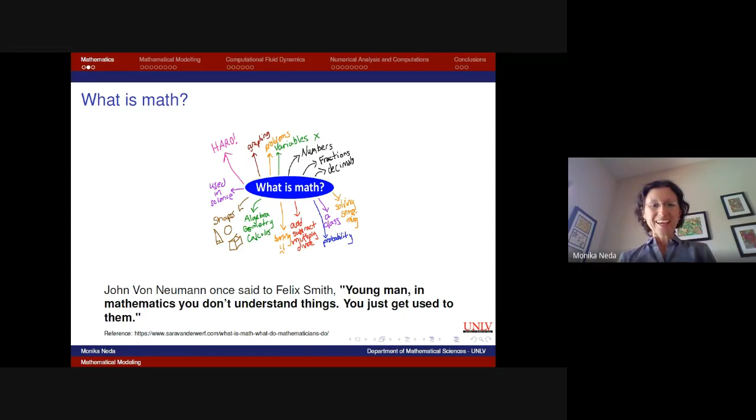Now, leaving that aside, what really is math? From Britannica, we have a definition that covers many things, but if we just take one step back, it's clear that math is all about structure, order, relation, backed by logical reasoning and quantitative calculations. Mathematics is indispensable to physical sciences and technology, and in more recent years, even to life sciences.

Now, the word mathematics comes from Old Greek, the ancient language mathema, which means that which is learned or what one gets to know, or study. So the roots of mathematics really lie in Greek civilization, which many years BC started to work on all these different topics that we're still using today.

So with that said, I'm going to go into mathematical modeling, which I think resonates with the general public and is connected with every corner of science you've probably been studying. So what are really the main steps in the process of modeling?

The first step is that you define a problem, or simply a problem appears to you and you need a solution for it. So we're trying to do this systematic approach where we break down this complex phenomena or process that we have in nature or in other industrial applications, and then try to find a solution for it.

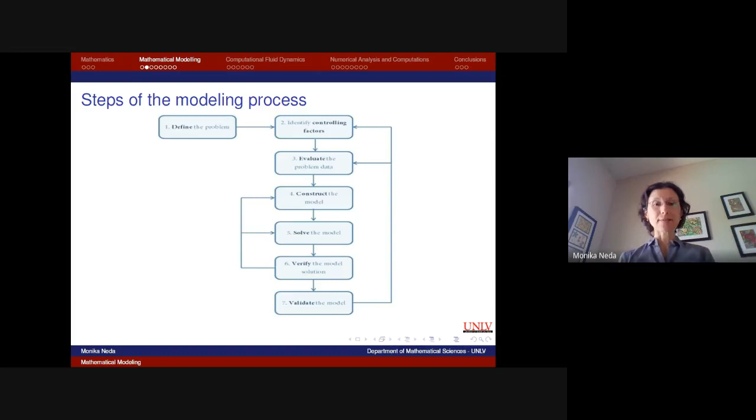So keeping some of these steps in mind, I'm going to try to quickly mimic them with a very simple problem: finding a function that models your electricity bill. Nevada Power gives us one every month—they have some functions, some model, they plug in some inputs, and they go back and get us the bill that gets mailed or emailed to all of us.

This is a very simple one here—they actually have a much more complicated thing. But let's say we have a charge of 11 cents per kilowatt hour for electricity, and a $15 basic connection charge per month. Well, this can be modeled with a very simple linear function, a line. We have 15 as our y-intercept, because when x is 0, meaning you did not spend anything, you still have to pay the $15 connection fee.

As you start spending, x is the kilowatt hour electricity usage, you multiply by 11 cents, 0.11, to get the total amount of charge in terms of x, the usage. So this function has a slope of 0.11, this change with respect to x, and it's simply a line, a graph, very easy to understand.

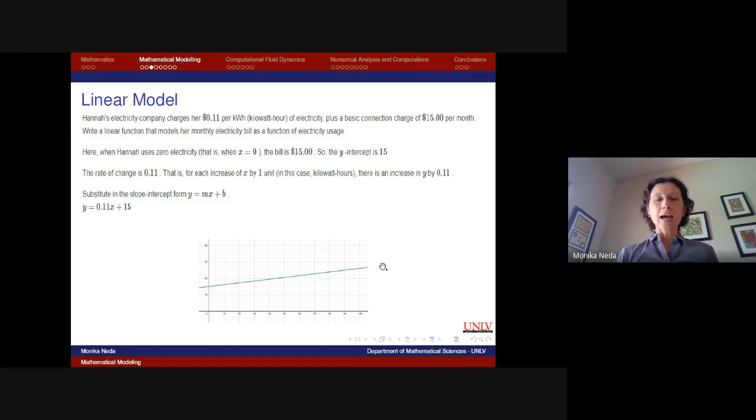Now let's move on to something a little more sophisticated: the basic SIR model, which is now so much talked about, since this is the classical model for modeling the spread of a disease in a population. So with this pandemic, COVID-19, this would be a classical model to see the spread of the disease in a population.

With that in mind, the members of the population are categorized into three groups: susceptible, denoted by S, infected, denoted by I, and recovered, denoted by R. So if I add my three groups, susceptible, infected, and recovered, I'll get the total population.

Now, since I want to see the change of these groups — the change of the susceptible, the change of the infected population, whether it's going up or down, and the change in the recovered population — what we do in math is take the derivative. So the derivative for us represents that change.

With that in mind, I'm differentiating my equation, and this is what I get. Assuming the total population is not changing, so no births, deaths, and so on, I get the right-hand side equal to 0, and on the left-hand side I have these three derivatives.

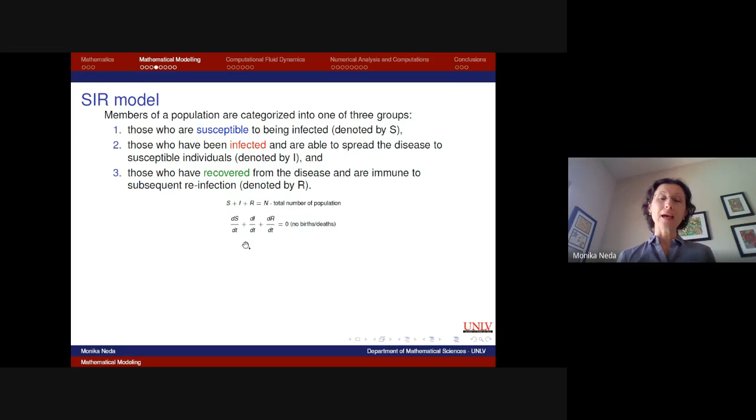Now we really need to describe an equation for each one of them. These will be the equations for ds/dt, di/dt, and dr/dt. As we can see, if we sum them up, we're going to get 0. But let me go back now one by one and try to analyze.

We can see that the change in the susceptible is proportional to the encounters between the susceptible population and infected population, with this rate alpha, which we call the infection rate. The susceptible population is going down, so that's why there's a minus, making the change negative. For the infected, the change is again proportional to the encounters between susceptible and infected population with the rate alpha, but now positive because the infected population goes up. And then we also take away, with the rate beta, which is our recovery rate, a portion of the infected population because they're going to recover.

And then dr/dt is simply proportional to the infected, with some rate beta, the recovery rate. So as we can see, when we sum them up, they equal 0. This is how they're defined in the most basic way. Of course, this doesn't account for everything happening in communities and so on, but it gives us a flavor of how the populations of susceptible, infected, and recovered change over time.

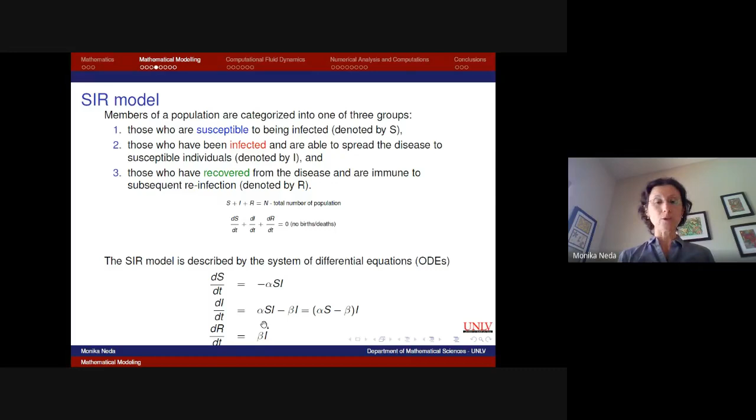Alpha can be computed simply as gamma times beta. This is how we get our hands on some of these parameters. Now, having these parameters and equations, the system of our SIR, which is the basic model for the spread of disease, can be simulated.

So with that in mind, we can obtain our functions because now the solutions are functions. I have a function for the susceptible population in time, so my x-axis is time, and I see how the susceptible are moving in time. Then I is the infected, the function of the infected population in time, and R is the recovered, the function of the recovered population in time.

And I have here some specific constants that I picked. For alpha, we have 2, and for beta, I picked 0.3. This might be better if I try to simply run it. So if I go here, let's see here.

Okay, so we're inside of an applet here, so we can animate and you can see at a specific time how these numbers are changing. So how the recovery goes up, the infection goes down, the susceptible go down as well. But at some point, which is around here, for example, around 4 days, we can see that's when we reached the maximum for the infected population, and afterward it went down.

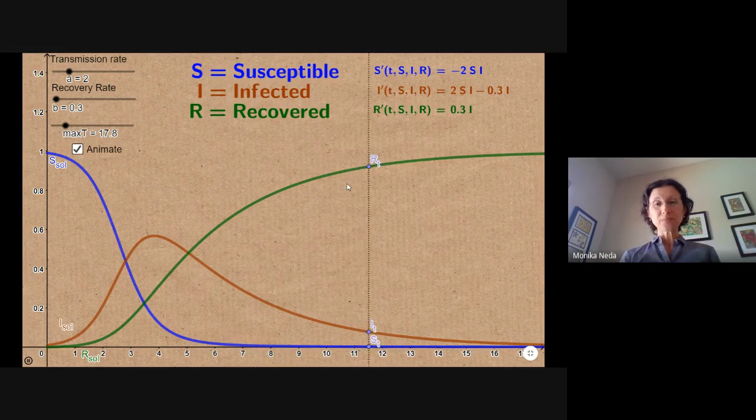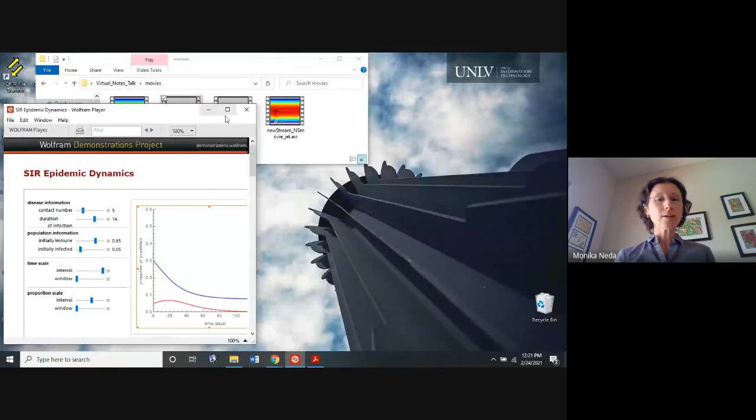So this is the model SIR that was used even to model measles and some other diseases during history. Now here I have another applet, and from this one, what we can see, and what I'm trying to point out, is that we can play with some of the numbers.

So we can see that the contact number, I set it to 5. It might be small on your screen, but the contact number is 5, which helps us finding that alpha and beta. And then the duration of infection, I put at 14. These are pretty reasonable numbers for our COVID-19 model.

And then initially infected, I put it very low, like 0.05. And initially immune, this I put very strong, like 65% of the population, so that we can try to see what happens like when this vaccine, let's say, kicks in, and this initially immune population that we have is much higher.

So what happens is that reproduction number, also known and used a lot in literature these days, even on TV, you hear it. If it goes less than 1, that means that in my derivative, that change of the infected population is simply becoming negative, so it will die out. So this is the comment on the side here.

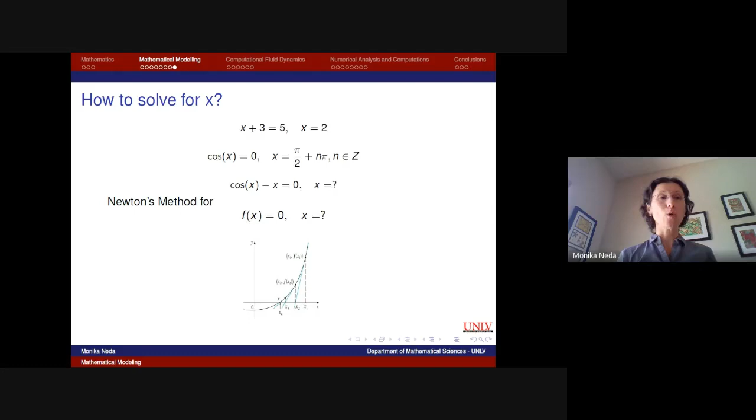So one of the older methods is Newton's method. This is how you can solve a more complicated nonlinear equation equaling to 0. You look at the tangent lines, find their intersection with the x-axis, and those intersections are your approximations of the root. We may not find the exact value of the root, but a very close one. With that in mind, let's go into computational fluid dynamics.

And what is that all about? We started with the modeling of a very simple linear function for electricity bill. Then we had a system of ODEs, differential equations for the SIR model that models the spread of a disease such as COVID-19. Now if we go into fluid dynamics, this is where we see models based on partial differential equations.

Why fluid dynamics? Well, it has so many applications, like engineering engine combustion, biophysical applications like blood flow in our veins and arteries, then climate applications and weather forecasting. This is where these partial differential equations come into play.

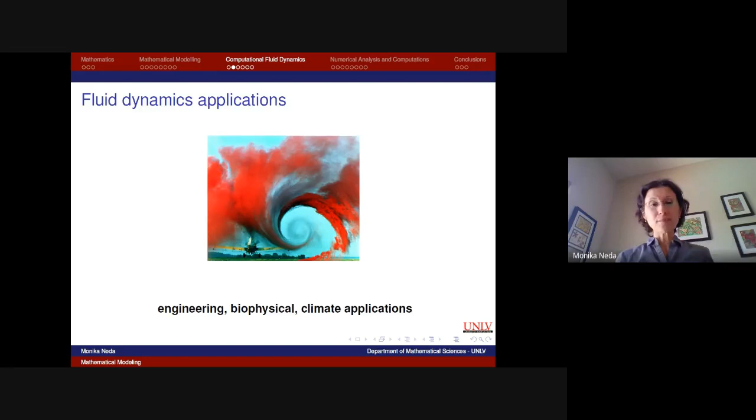So what if we could catch the wind or calm the seas? Impossible might be, but researchers are investigating natural phenomena, and one of them that I have been studying is turbulence. So what is really turbulence? Well, von Neumann said that there is no sense in being precise when you don't even know what you're talking about. Turbulence is a very complex phenomenon, and it's really hard - we still don't have a precise mathematical definition for it. The way it's defined, usually in textbooks, is by listing its characteristics.

The turbulent flow is irregular. You have lots of change in space and time. When you look at these solutions, it's diffusive, rapid mixing is happening. Then we have the so-called Reynolds number, which is usually very high and gives us lots of trouble. Then we have this three-dimensional vorticity coming into place, those vortices like I just showed you at the tip of the wing. Then it's dissipative, and we have this characteristic of the continuum as well - whatever happens at the small scales is also preserved at the large scales.

So how is this flow simulated? Well, it's using the so-called Navier-Stokes equations, known for a good century, but we still struggle with the mathematical analysis of it. We cannot prove the existence of the solutions of these equations. For 3D existence of strong solutions, we know the uniqueness, but not the existence. Then we can talk about so-called weak solutions of this system of equations. We cannot talk about the uniqueness of the weak solutions - the weak solutions exist, but we don't know if they're unique. The strong solutions, we don't know if they exist, but we can prove that they are unique.

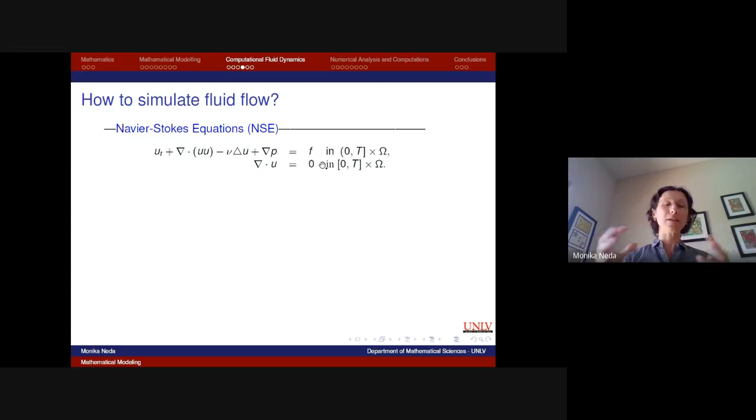So what appears when you non-dimensionalize the Navier-Stokes equations, you get this Reynolds number that equals L U over nu. L and U are some reference length and velocity, nu is the kinematic viscosity. So if the viscosity is very small, the Reynolds number would be very large.

And this is something that happens for us a lot in nature. Reynolds number is something that drives the flow. When we have turbulent flow, Reynolds number is very, very high. For airplanes, the Reynolds number is of order 10 to the 7. Atmospheric flows, like geophysical flows and so on, is 10 to the 20 even. And this gives us a little bit of trouble.

Now, I'm going to take a second and show some of my simulations where we can see the influence of the Reynolds number.

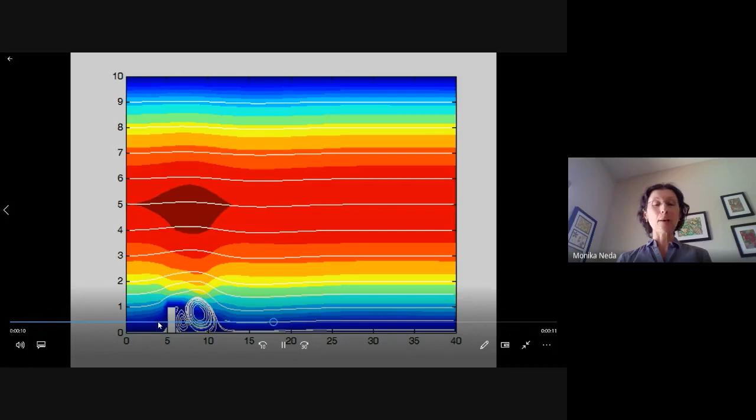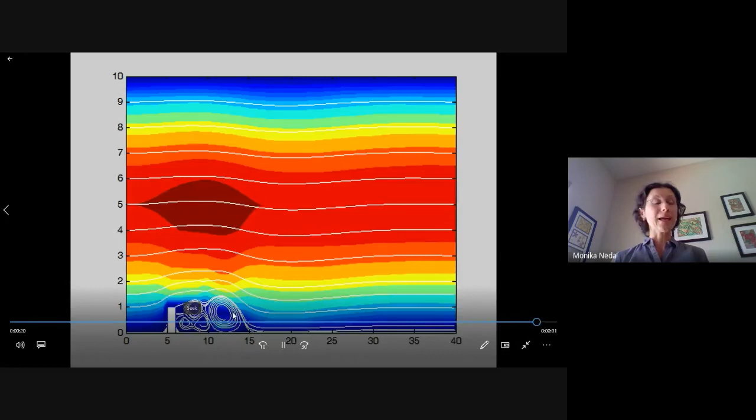Now let's say what happens if I put a different Reynolds number, how about 600? Which means the viscosity of the fluid changes. The flow again comes from the left side, hits this obstacle, this step, but now we can see the creation of these vortices. This is the interaction of the flow with the obstacle, and we can see how it creates and sheds these vortices, a big difference.

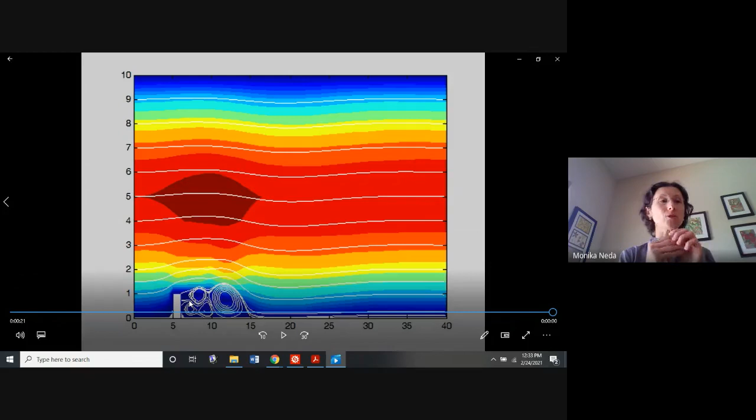And this is where, in these layers very close to boundaries, is where the drag and lift lives, and they are very important for us to resolve correctly.

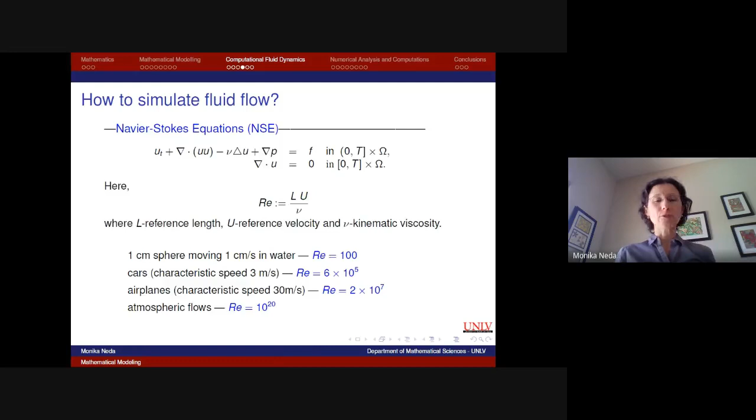Okay, so now if I go back to the presentation, the next thing is, after seeing those simulations for different Reynolds numbers, let's see what is the good way to simulate this. Well, you can use Navier-Stokes, but for that we have a theory that says you have to do a very small mesh, what we say when we do numerical methods, and that requires very large computer resources. So then one way is to do large eddy simulations, where you're looking at large structures.

Hopefully that will help model the influence of the small ones onto the big ones. You need less computer power for that. Okay, so then how do you do it?

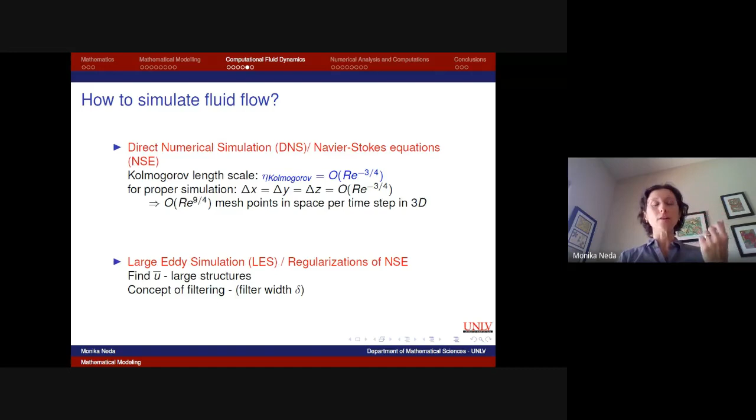Well, you're going to filter your Navier-Stokes equations. You're going to close somehow the models, close the equations, and based on the way you close those equations, you can get different models. One model that I work on a lot is the so-called time relaxation model. As you can see, it's very similar to the Navier-Stokes equation, I just have this extra term here, one that will induce some type of artificial viscosity and will model the influence of the small scales upon these large scales and so on.

So this is the term that represents these generalized fluctuations and so on. Bar represents here the filtering, using this differential equation that we're using to filter.

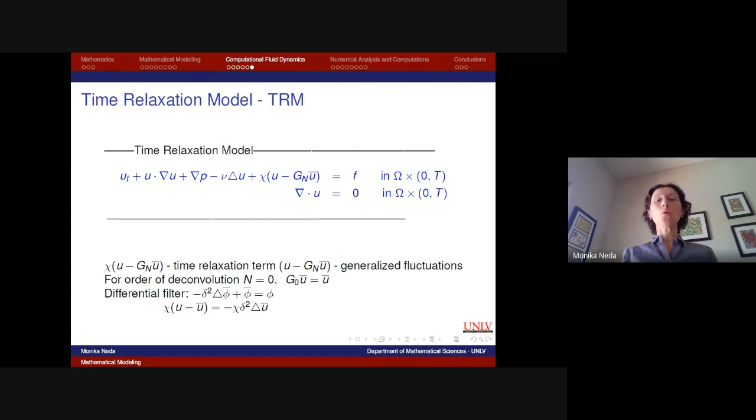Okay, so then let's go into some numerical analysis and computations with this model. So what did we do? Well, the most important thing is the energy. You want to make sure that your model has a very good energy balance, what we say, and this is the energy balance written here mathematically with symbols and so on.

So what happens here is that if there's no body force, if F is 0 and if chi is 0, your coefficients, nu viscosity, in the absence of the viscosity, then we have that the energy, this norm of the velocity at any given time t, is going to equal the initial energy.

So the energy gets preserved, as we would say. There's a lot of discussion about how the energy cascades from large scales into smaller scales and so on, until it hits viscosity.

Kolmogorov, this big Russian mathematician, worked a lot on this theory for the energy, understanding what is the smallest scale that appears, the smallest vortex or rotational structure that appears in the flow. He gave results for all that in his famous K41 theory, written during the Second World War—41 comes from the year 1941.

So all this math that was developed later, in the 40s, was actually observed earlier, in the 20s, by Richardson, but he just had a very poetic description of it, saying how big whirls have little whirls that feed on their velocity, and little whirls have lesser whirls, and so on, until it reaches viscosity, where the energy gets transferred into heat.

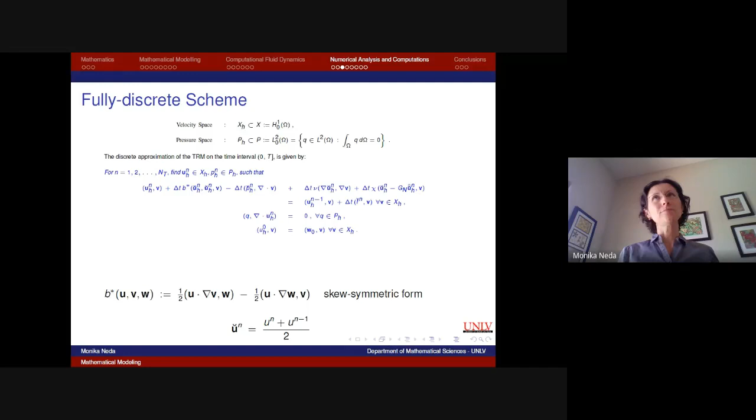Now also mathematically, I can say okay, I get a system, I have my matrix, which is very large, and we have problems with that matrix—it's sparse, so we have to allocate the memory for it, and so on.

Okay, so after that, having this, and before I even try to solve it, I really want to make sure that my iteration is computable, that the solution exists. So this is where we go with pencil and paper, and we really show mathematically that the finite element variational formulation does have a solution.

So we have the existence of the solution, and it makes sense then to go compute it. And this existence gives the stability bound, such as the one written here. It's very important that in some norm, the velocity is bounded by my data, which is the body force F, or the initial condition U0, and so on.

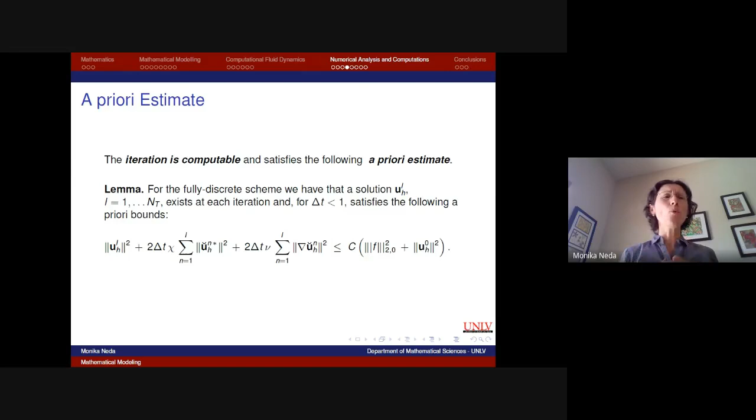So that means that if I have some change in my data, in F or the initial condition, my solution will not change by much, because it's bounded—it's less than or equal to this stuff here on the right-hand side. And that's very important. We can look into that even more through some kind of sensitivity analysis that can be performed.

You're not going away from it. So these kind of estimates that I have here, again, pencil and paper, this is where we show that this solution that really the computer will compute for me tends to the true solution of the Navier-Stokes. I'm not just solving for something that it's not meaningful.

It's a meaningful convergence that we have here, convergence towards the true solution. And there are lots of parameters floating around for us, like h, the mesh size, and delta t, the time step we're taking. If we let those go to 0, then the right-hand side will go to 0. And in the right-hand side, what we have is also this function f that is defined by all these norms, but everywhere we have powers of h and delta t.

So that will go to 0 as well when we let these two quantities, delta t and h, go to 0. So we have now all this nice theory in the background. I have this model, I discretized it, implemented some numerical method. I showed that the numerical solution exists and converges towards the true solution.

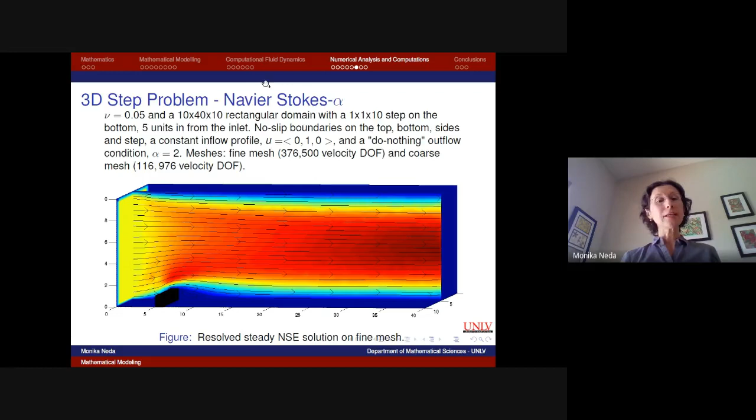So what we want is, we know that Navier-Stokes will give us trouble unless we go with a very, very fine mesh, and that's not feasible for us. That's why we'll look into these models in fluid dynamics, different types of modeling, stabilizations, regularizations of the Navier-Stokes equations. So one such model is the Navier-Stokes alpha model.

And so the next slide will give you a zoom in behind the step, what's going on. So these are some stream ribbons here that represent the way the flow moves behind the step, so we can see this rotational structure, and this is where that drag and lift, as I said, lives.

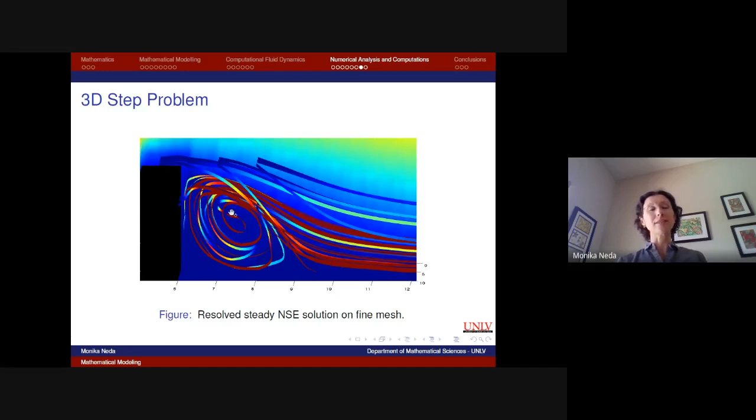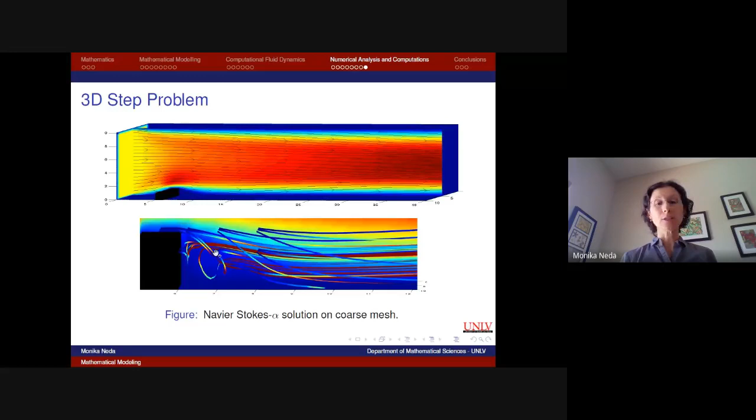So this is a coarser mesh. Now we are challenging our model on a coarse mesh with less computational power. Is it possible for us to obtain these rotational structures? And we got good results here.

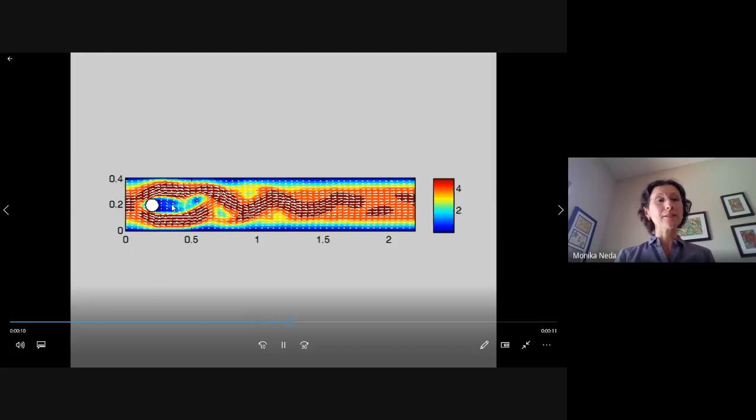This is the famous von Karman vortex street for us, the benchmark problem, so the models will have to show something like this. And then here behind the cylinder is where we can see the formation of the rotational structures, and this is again where that drag lives. Aerodynamics and fluid dynamics is a lot about the computations of the drag and lift.

Okay, so this simulation was done really with the Navier-Stokes equations here, and then we tried to use our model and show that we get the same thing by using less degrees of freedom, a smaller mesh.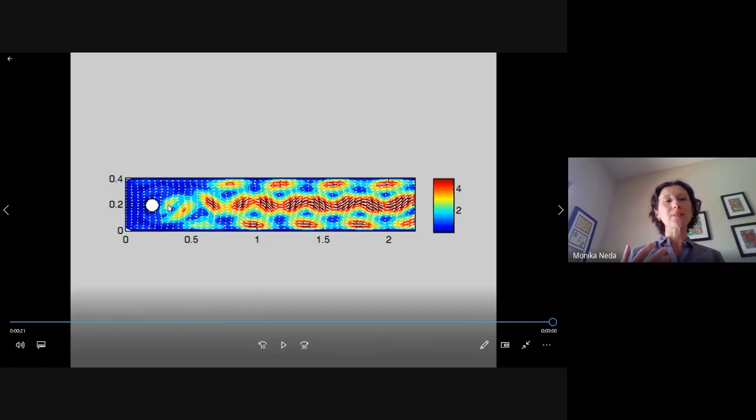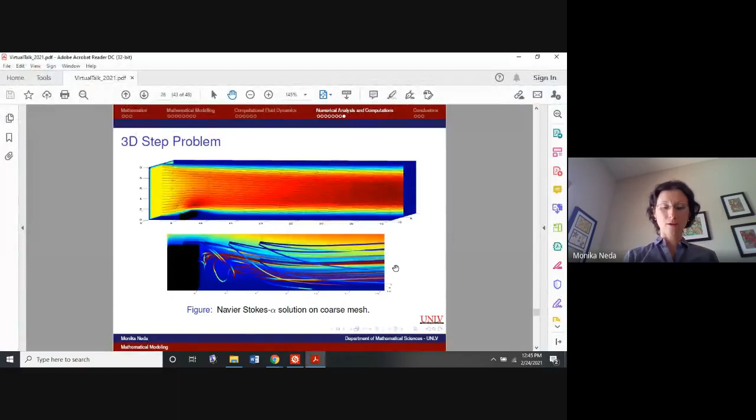Now let's see what can we say about some conclusions. All models are wrong, but some are useful. This is the famous quote of the statistician George Box. And as strange as it sounds, probably it is true, because just the complexity that we have in nature at this moment is really impossible for us to get that perfection in a model.

But that doesn't mean that we should not do it, because every single model might be wrong, meaning that it will never represent the real behavior. But on the other side, if a model cannot describe exactly the reality, it will still be extremely helpful if it is close enough. We may not be able to describe the flow around an airfoil exactly, but airfoils still let us fly.

So these simulations are very useful, because sometimes they can cut bills from modeling things, or overall it can give a prediction of something that may happen, and based on that, important decisions can be made.

So again, even if a model cannot describe exactly that complex reality that we have around us on an everyday basis, it can still be very helpful if it is close enough. And this being close enough, this is where math comes into play, and this is where math shows how close we really are. These are those norms, those theorems that I showed, that we have the existence of this solution, and that this solution tends to the true solution, using mathematical methods and mathematical tools to back up our closeness to this reality that we have.